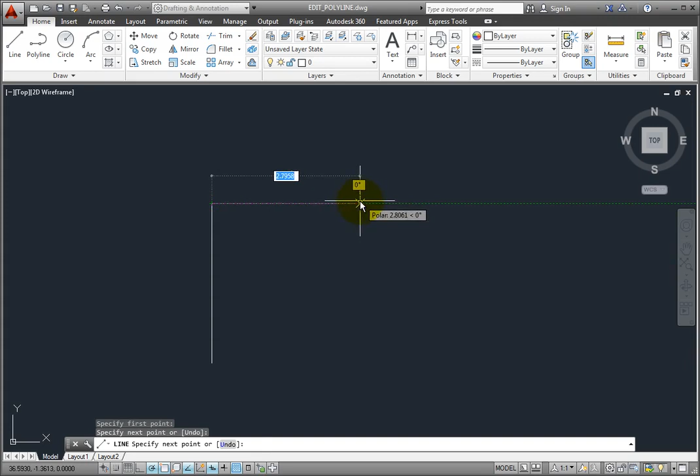If you've created objects as individual lines and arcs, in other words, let's say I just started creating some geometry here. I'll start the line command, and I'll pick some points. And I'll end the line command, and I'll start the arc command, and I'll draw a continuation of that line.

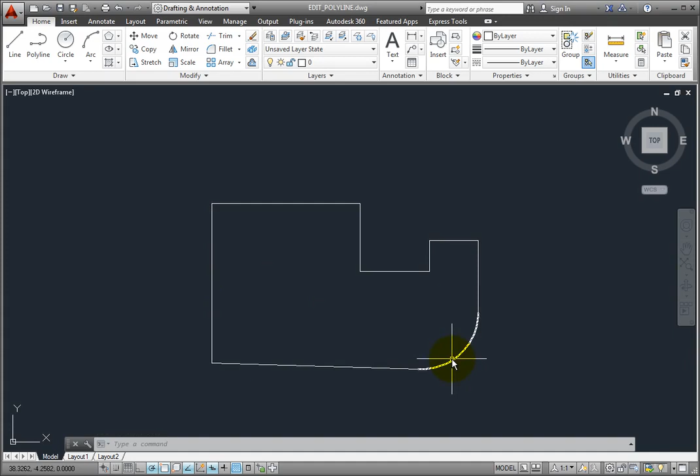And then I'll start the line command again, and I'll draw a line from this end of the arc back to the end point of the first line. Okay, so these are individual line and arc segments. Now what I'd like to do is to take these objects and convert them all into a single polyline, because right now it's just a collection of individual objects.

I'll expand the Modify panel on the Home ribbon and choose the Edit Polyline tool. Because all of the objects are snapped to endpoints, I can either choose the Select Polyline option or the Multiple option. Let's use the Select Polyline option first.

I'll select this line, and the obvious response that comes back is, it's not a polyline. Do you want to turn this into one? And the answer, by default, is yes. I'll press the Enter key. Now, what I want to do is to choose the Join option.

But before I do that, to prove to you that this actually works, I'm going to first set a width for this first segment that I just created. I'll make it 0.25 units. So you can see that that segment did indeed turn into a polyline. Now I'm going to choose the Join option.

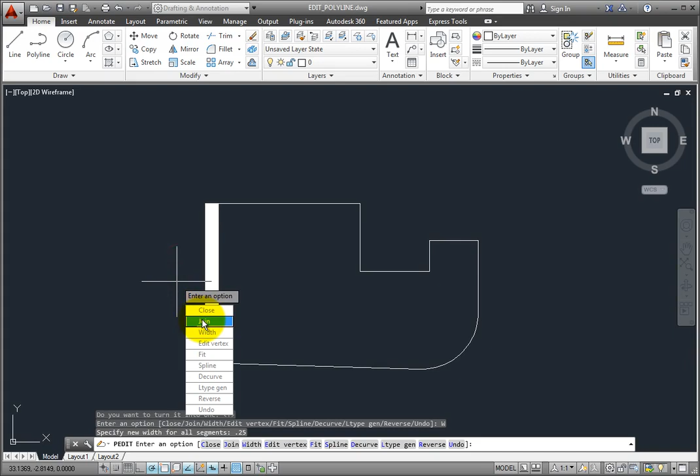And I'm going to choose all of the other geometry. And it doesn't matter whether I choose the original object or not. Once I've selected all of those objects, I can press the Enter key or right-click with the mouse, and notice that all of those segments are immediately joined so that they're now part of one continuous polyline object.

I'll press the Escape key to end the command. And then, when I move the cursor over the object, you can see that it's been converted into one single continuous closed polyline object. Let's do it another way. I'll click the Undo button. So I've restored it back, so this is simply individual line segments and an arc again.

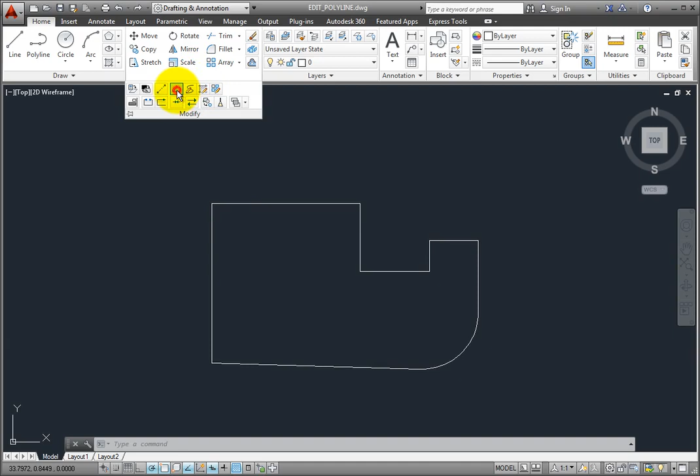I'll choose the Edit Polyline command, and this time I'll right-click and choose the Multiple option. Now I'll select all of the geometry. When I'm done selecting geometry, I can right-click or press the Enter key. Again, the program is going to ask me if I want to convert all of these lines and arcs into polylines. And again, I can simply press Enter to say yes.

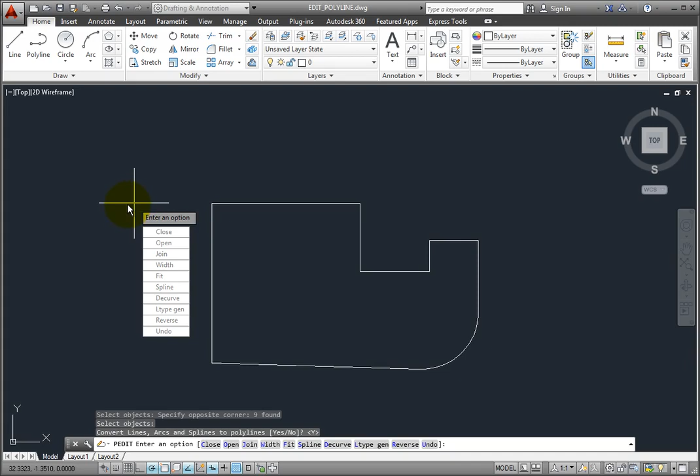Now I see the Edit Polyline options again. And I'm going to need to select the Join option in order to join them all together. But before I do that, let me specify a width. And I'm going to specify a width of 0.5 units for all of the segments.

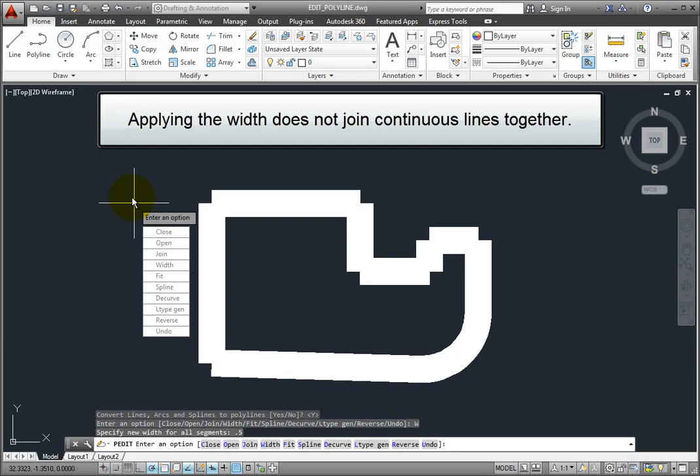Okay, notice that because I didn't select the Join option, it doesn't look quite right. It doesn't look quite right because right now it did convert all of these segments into polylines, but they're all separate polylines. They're not joined together yet as one continuous polyline. I must still use the Join option.

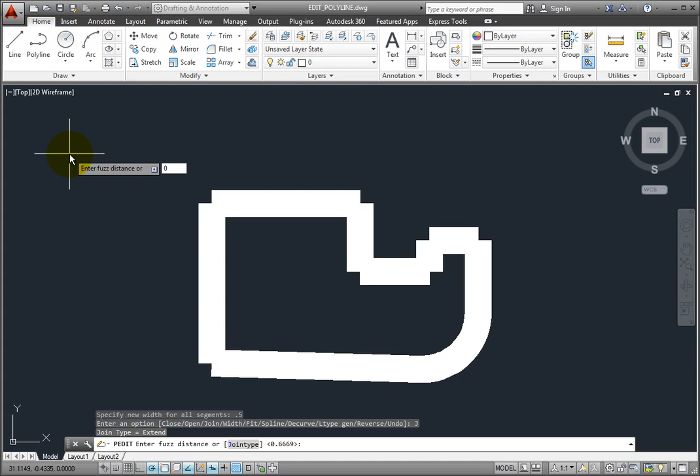Because I used the Multiple option, the program is still prompting me for a fuzz distance. This time, I can set the fuzz distance to 0. I would only set a distance here if for some reason these segments did not touch or weren't snapped to their endpoints. Then I would specify a fuzz distance based on the largest gap. I'll enter a distance of 0 and then press Enter.

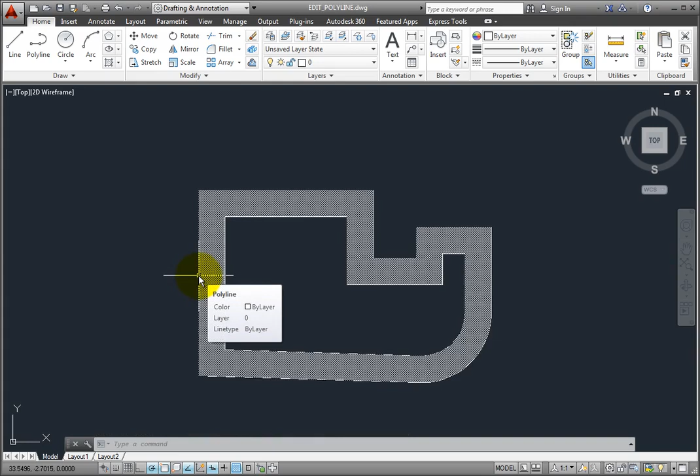Notice that as soon as I press Enter, the program joins all of those segments together. You can tell just by looking at the intersections at the corners. I'll press the Enter key to end the command. And now you can see, when I move my cursor over the object, that the object is now a single polyline. A single polyline object that's been converted from the individual line and arc segments.